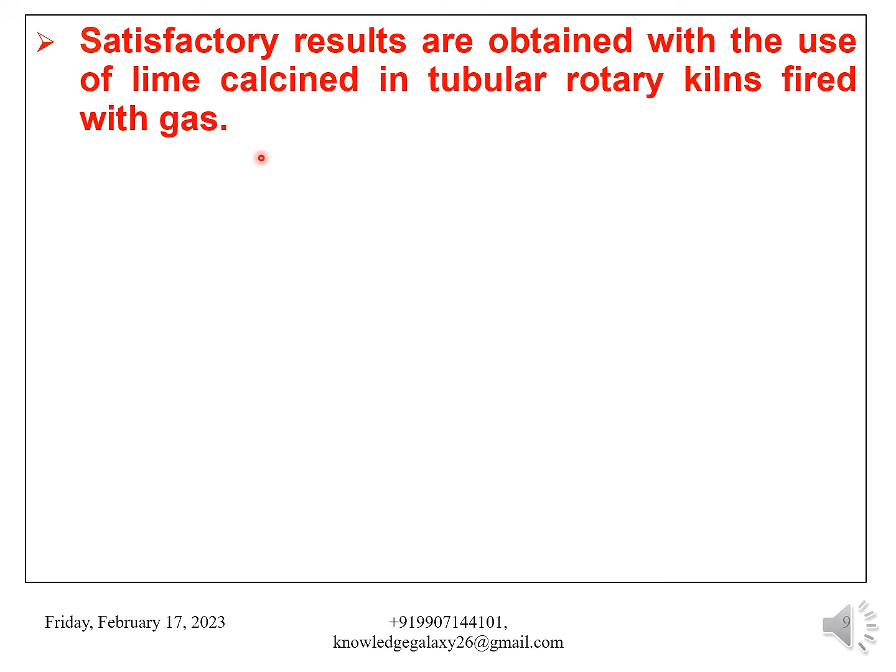The lime should be freshly burnt and contain at least 90% CaO and maximum 0.025% phosphorus, with a lump size of 80 mm maximum. Satisfactory results are obtained with the use of lime calcined in a tubular rotary kiln fired with gas. This lime is not contaminated by carbon bearing materials in the calcination process and is uniform in size. Its CaO content exceeds 93%.

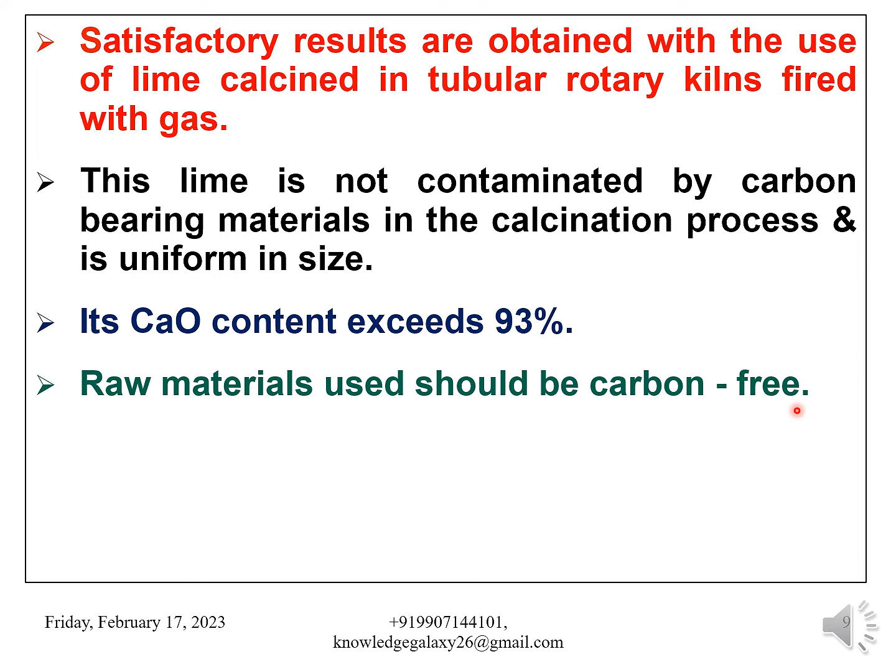Raw materials used should be carbon free. This special care must always be taken that the raw materials used should be carbon free. The composition of mixtures is set according to calculations and is checked during the smelting process.

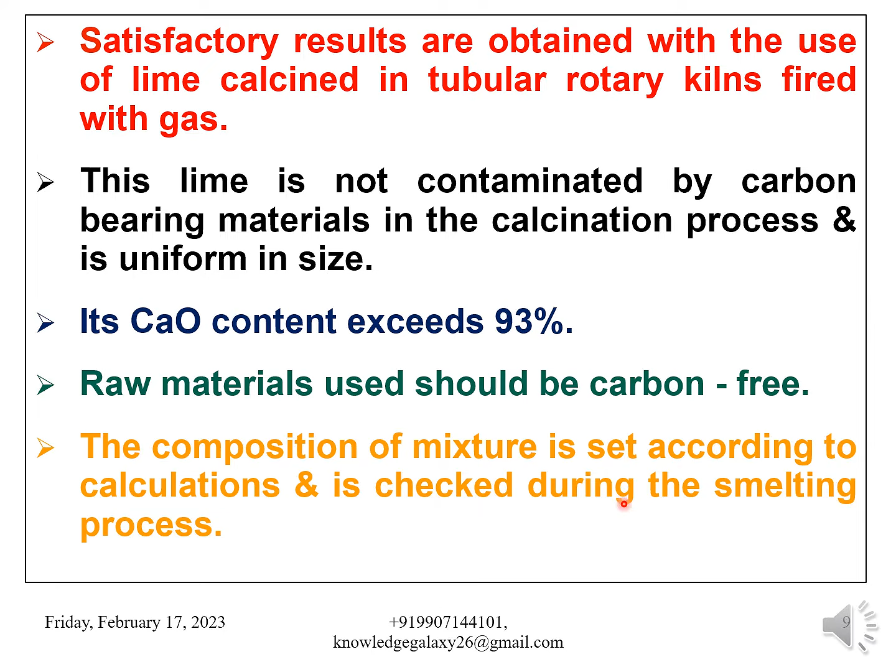The charge is calculated for 100 kg of chromium ore. The chromium ore assays 53% Cr2O3, 14% FeO, 7% SiO2, 12% MgO, 11% Al2O3, 2% calcination losses and 1% moisture. My dear friends, this is a typical example and analysis of the chromium ore. It may vary depending upon the availability of chromium ore and concentrates with you.

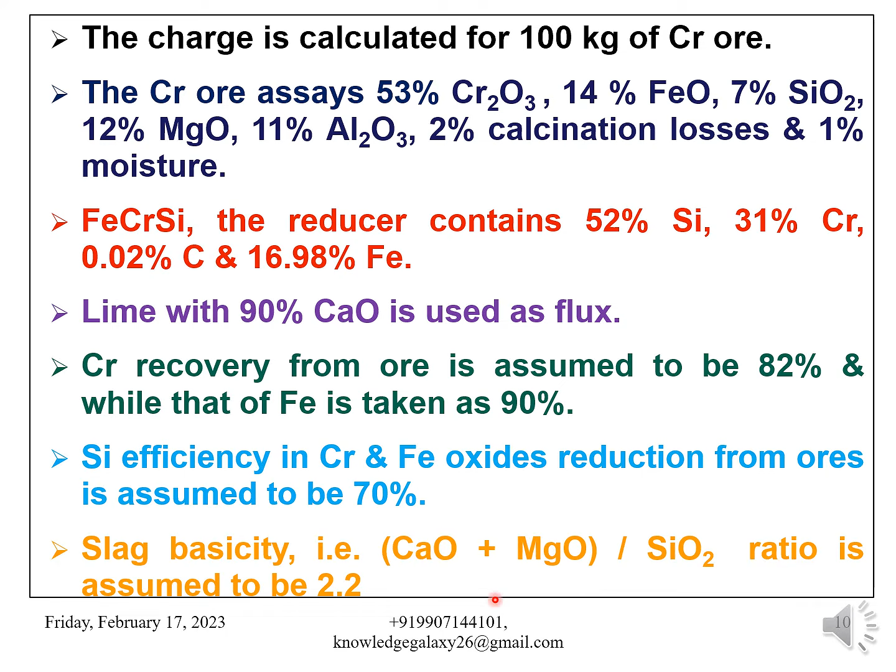Ferrochrome silicon, the reducer, contains 52% silicon, 31% chromium, 0.02% carbon and 16.98% iron. Lime with 90% CaO is used as flux. Chromium recovery from ore is assumed to be 82%, while that of iron is taken as 90%. Silicon efficiency in chromium and iron oxides reduction from ores is assumed to be 70%. Slag basicity, that is CaO plus MgO divided by SiO2 ratio, is assumed to be 2.2.

The charge is calculated so as to get an alloy containing 0.06% carbon and 0.70% silicon. The following amounts of components per 100 kg of chromium ore are reduced and reverted to the alloy.

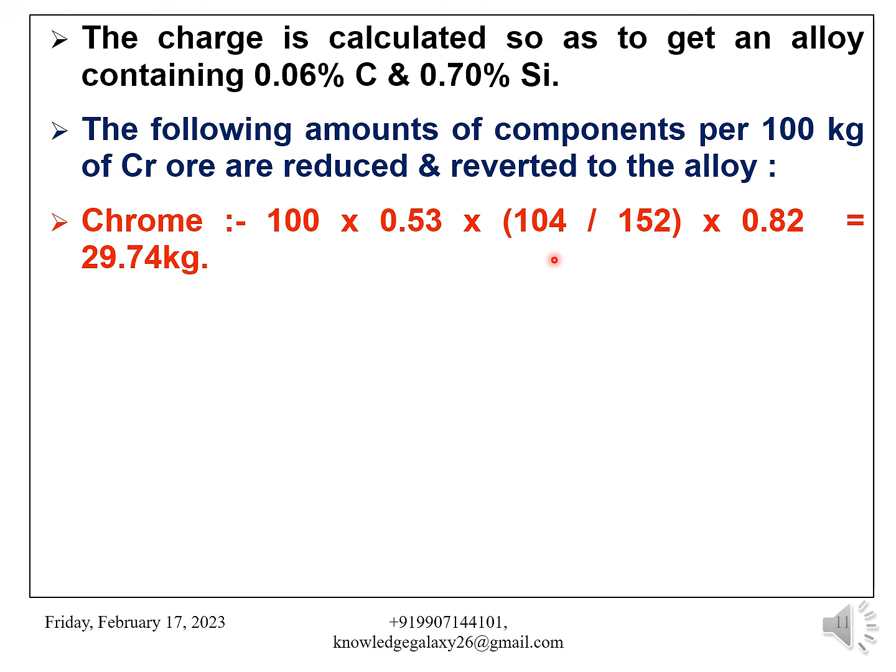Chrome: 100 into 0.53 into 104 divided by 152 into 0.82 is equal to 29.74 kg. My dear friends, here you have to always keep in mind the atomic weights of respective elements and compounds for calculating the quantities.

Next is iron: 100 into 0.14 into 56 divided by 72 into 0.9 is equal to 9.8. Here I would like to again bring to your notice that 0.82 and 0.9 are 82% and 90% recovery of chromium and iron respectively.

Amount of silicon required for the reduction of Cr2O3 by the reaction 2Cr2O3 plus 3Si is equal to 4Cr plus 3SiO2. It comes to 29.74 into 84 divided by 208 is equal to 12.01 kg.

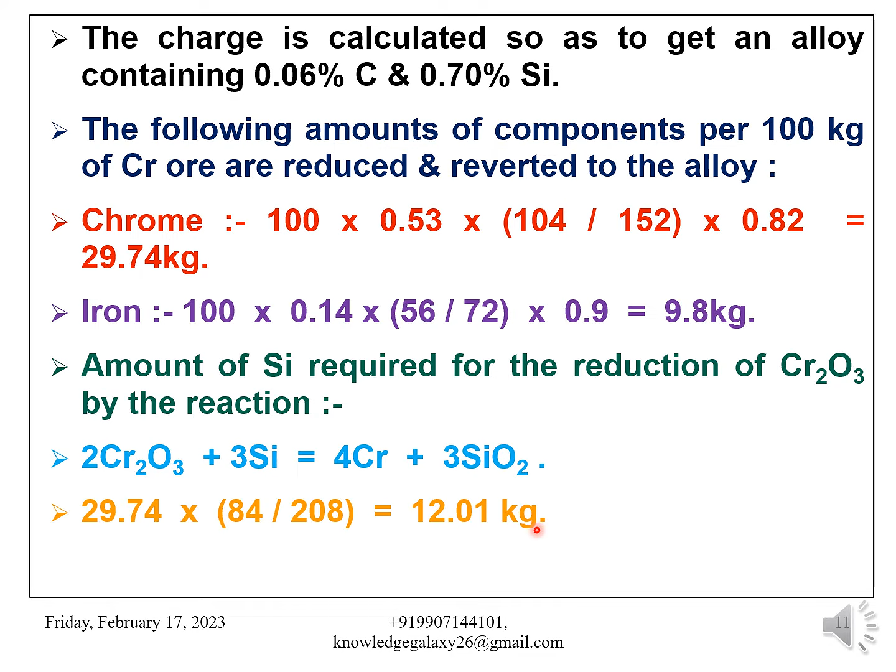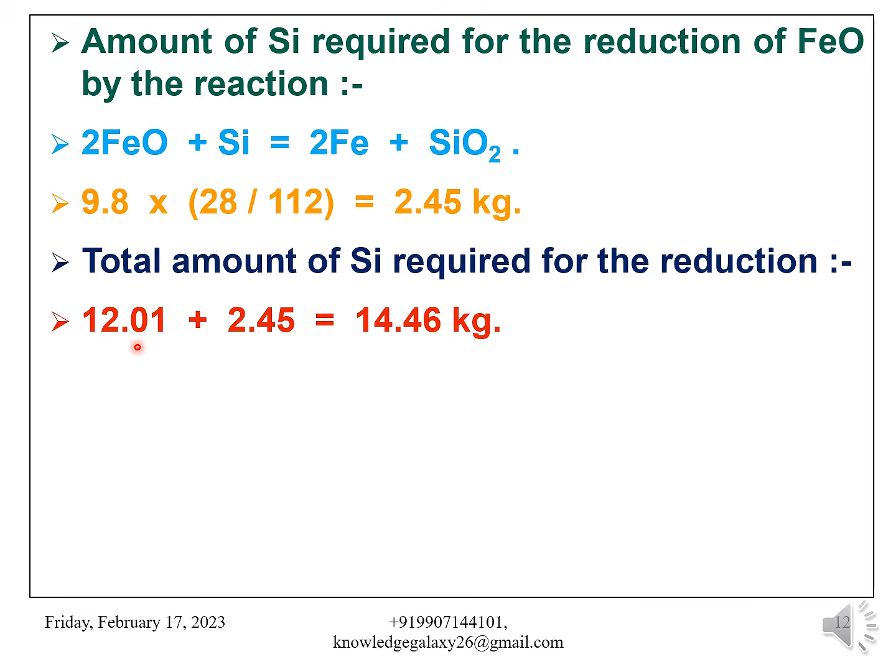Amount of silicon required for the reduction of FeO by the reaction 2FeO plus Si is equal to 2Fe plus SiO2, and it comes to 9.8 into 28 divided by 112 is equal to 2.45 kg. Total amount of silicon required for the reduction comes to 12.01 plus 2.45 is equal to 14.46 kg.

Amount of ferrochrome silicon required including volatilization losses is calculated as 14.46 divided by 0.52 into 0.7 is equal to 39.73 kg.

The following amounts of components are reverted to the alloy from ferrochrome silicon. Chromium: 39.73 into 0.31 is equal to 12.32 kg. Iron: 39.73 into 0.1698 is equal to 6.75 kg. Carbon: 39.73 into 0.0002 is equal to 0.008 kg.

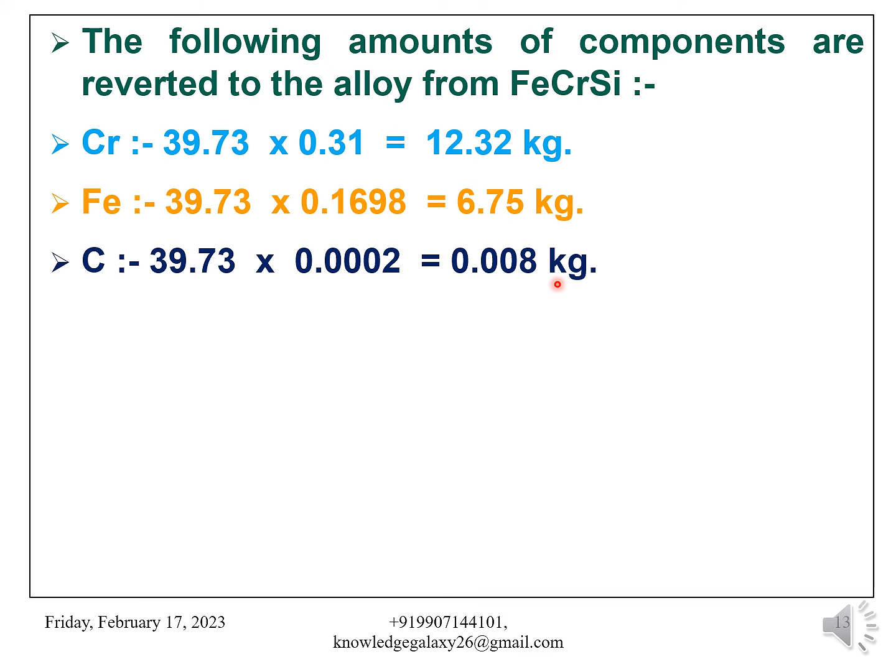The remaining amount of carbon up to the 0.06% carbon level is reverted to the alloy from the electrodes.

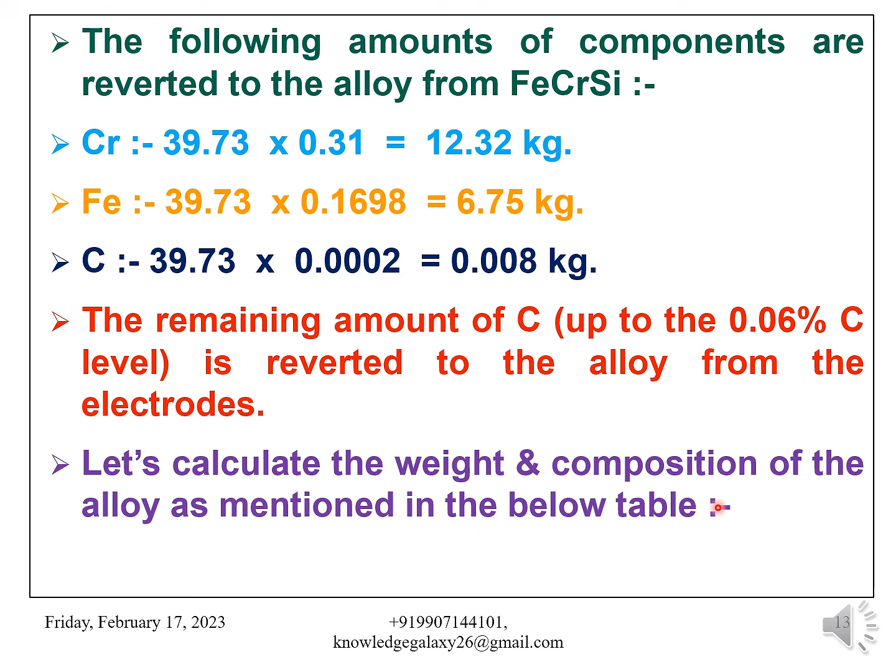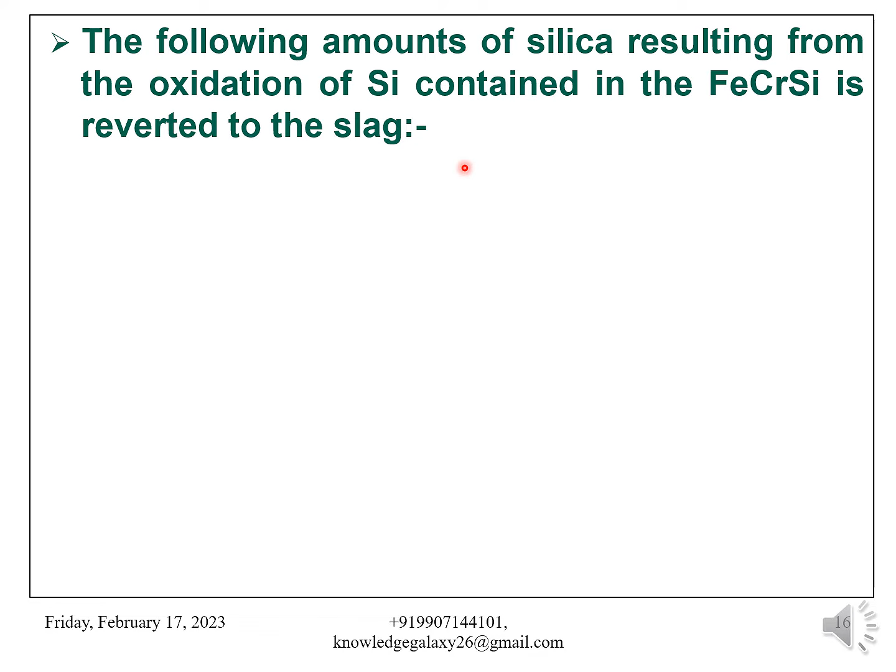Coming back, the following amounts of silica resulting from the oxidation of silicon contained in the ferrochrome silicon is reverted to the slag: 39.73 into 0.52 minus 0.42 into 60 divided by 28 is equal to 43.37 kg.

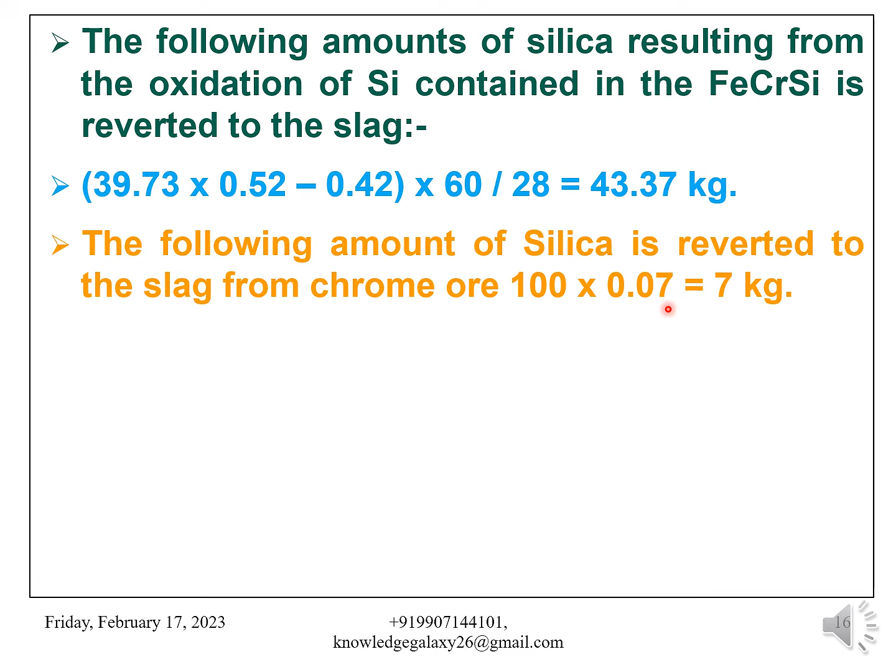The following amount of silica is reverted to the slag from chrome ore is equal to 100 into 0.07 is equal to 7 kg. Total silica contained in the slag is equal to 43.37 plus 7 is equal to 50.37 kg.

The amount of basic oxides CaO plus MgO required in the slag is calculated as 50.37 into 2.2 is equal to 110.81 kg.

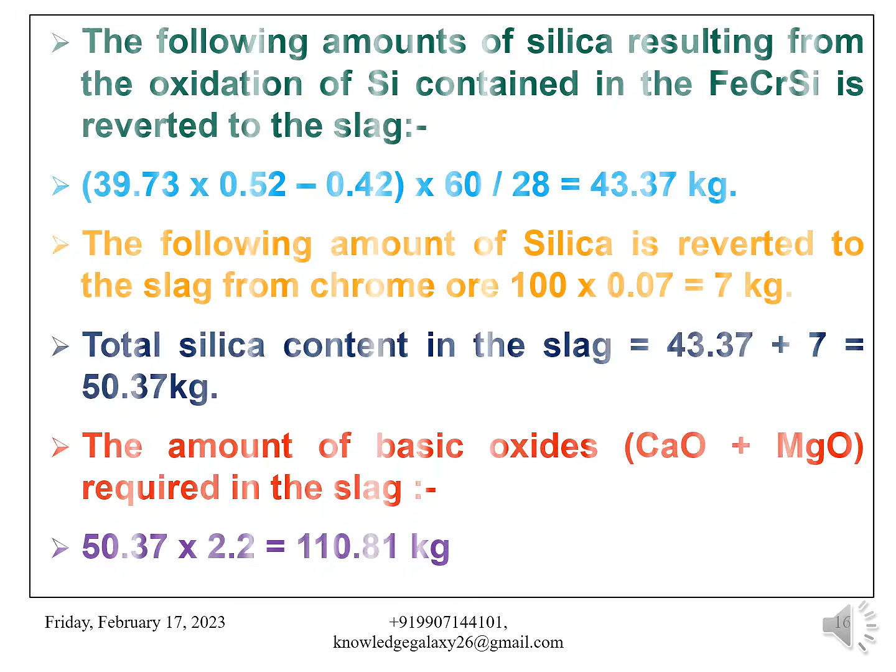The amount of MgO reverted to the slag from the chrome ore is calculated as 100 into 0.12 is equal to 12 kg. The amount of CaO to be introduced by lime is equal to 110.81 minus 12 is equal to 98.81 kg. This requires 98.81 divided by 0.9 is equal to 109.80 kg of lime.

The weight and composition of the slag are given in the table below. My dear friends, this table is also comprehensive, giving typical analysis of the various constituents, with their amounts in kg and percentage mentioned. You can pause the video and observe the table and its contents.

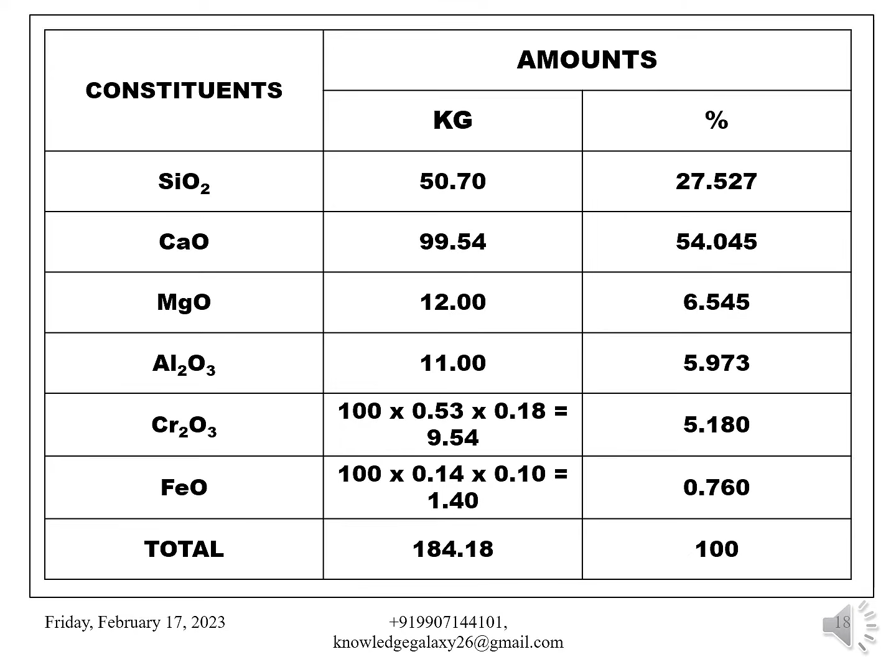Slag to alloy ratio is calculated as 184.18 divided by 59.06, which is equal to 3.12.

Composition of the mixture is summarized as chrome ore 100 kg, ferrochrome silicon 39.73 kg, lime 109.80 kg.

Chrome content in the mixture is calculated as 100 into 0.53 into 104 by 152, plus 12.32, which is equal to 36.26 plus 12.32, total comes to 48.58 kg.

Total chromium recovery to the alloy is calculated as 42.06 divided by 48.58 into 100, which is equal to 86.58%.

Dear friends, now I am going to discuss about the furnace, its lining, refractory linings, power ratings and other process parameters. So let us move on.

Furnaces smelting low carbon and extra low carbon ferrochrome are lined with magnesite firebricks. Furnace power rating is kept as 2500 to 3500 kVA.

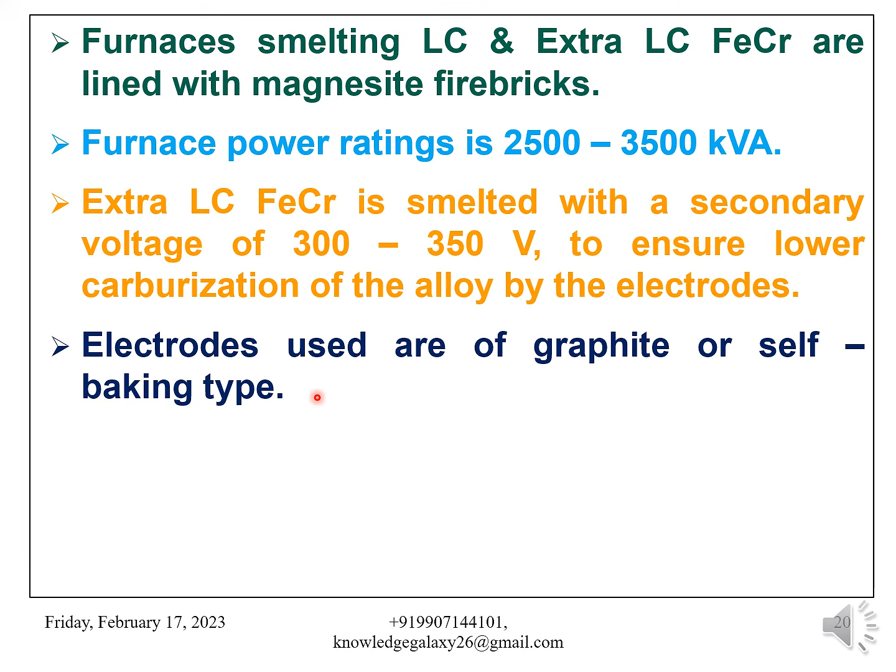Extra low carbon ferrochrome is smelted with a secondary voltage of 300 to 350 volts to ensure lower carburization of the alloy by the electrodes. Electrodes used are of graphite or self-baking type.

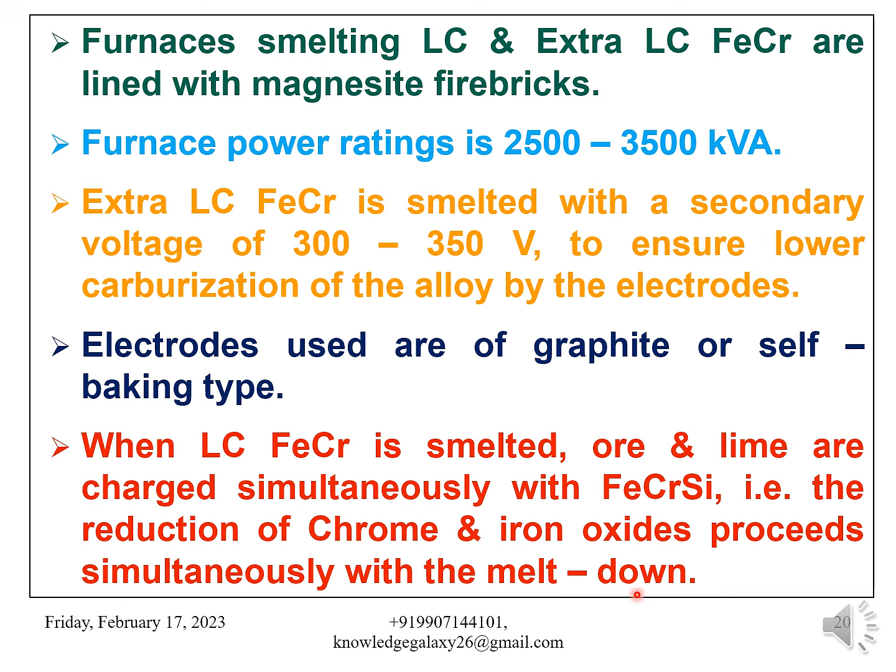When low carbon ferrochrome is smelted, ore and lime are charged simultaneously with ferrochrome silicon, that is, the reduction of chrome and iron oxides proceeds simultaneously with the meltdown. This shortens the duration of the heat through improved utilization of the heat generated by chrome and iron oxide reduction reactions.

In smelting extra low carbon ferrochrome, ferrochrome silicon is charged following the meltdown of the previously charged ore and lime. This ensures a decrease in the carbon content in the alloy because the furnace operates on highly conductive lime slags without silica additions.

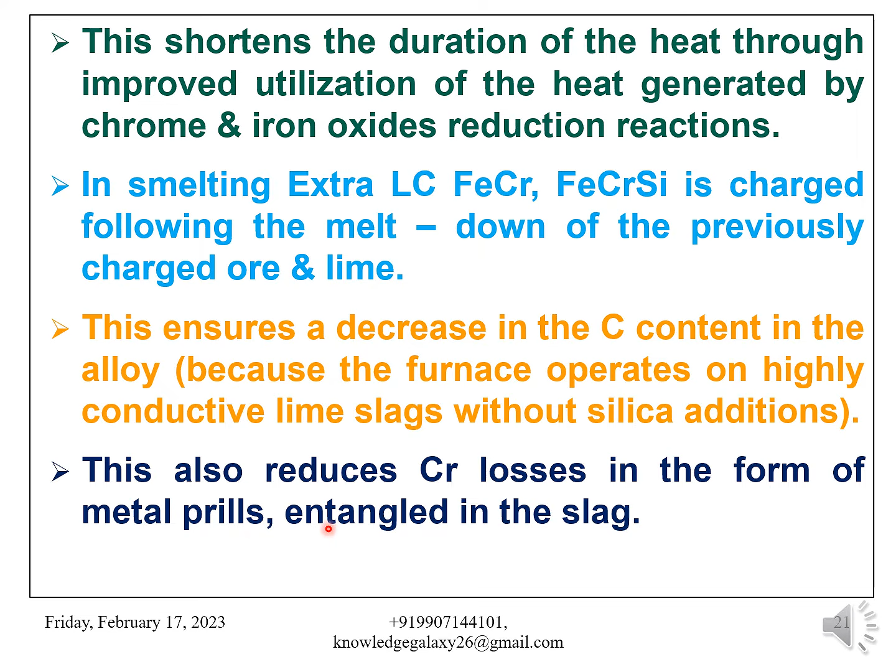This also reduces chromium losses in the form of metal prills entangled in the slag.

The smelting of extra low carbon ferrochrome is a periodic process and consists of the following stages. First, charging of the burden, that is ore and lime. Next is meltdown of the ore lime mixture.

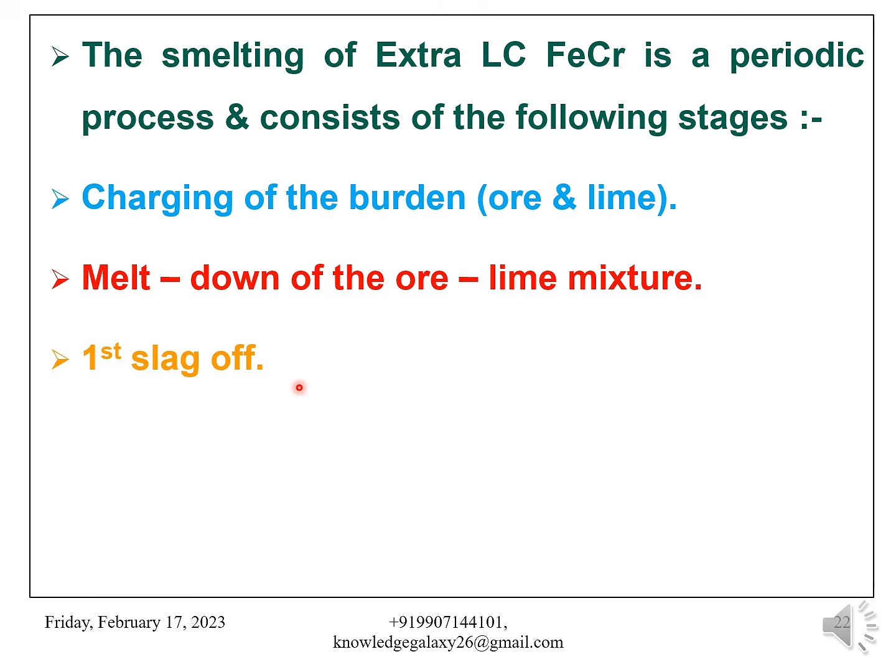Then first slag off. Next step is reduction of the ore lime melt by ferrochrome silicon. Tapping of the heat metal and remaining slag.

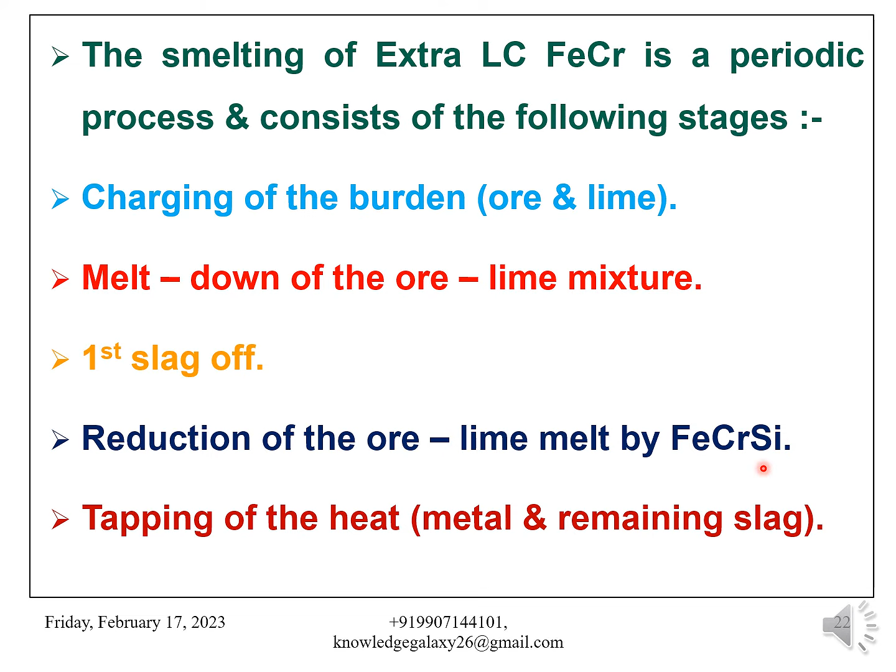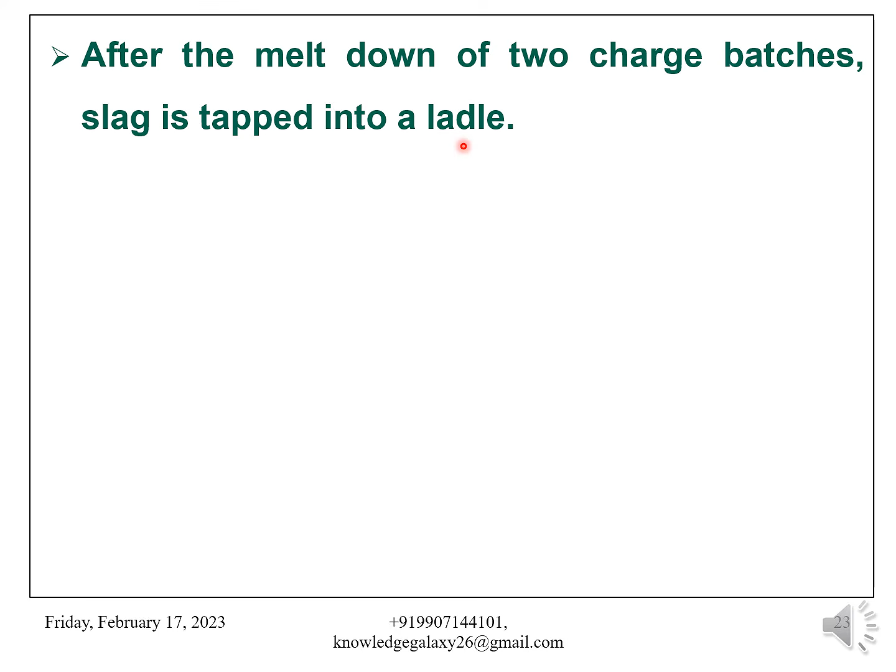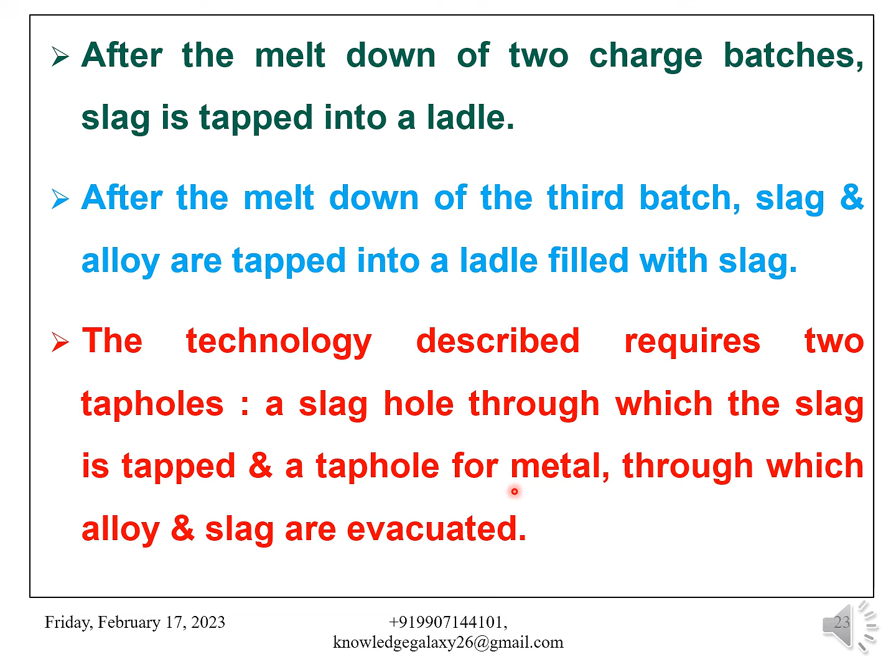After the meltdown of two charged batches, slag is tapped into a ladle. After the meltdown of the third batch, slag and alloy are tapped into a ladle filled with slag. The technology described requires two tap holes, a slag hole through which the slag is tapped and a tap hole for metal through which alloy and slag are evacuated.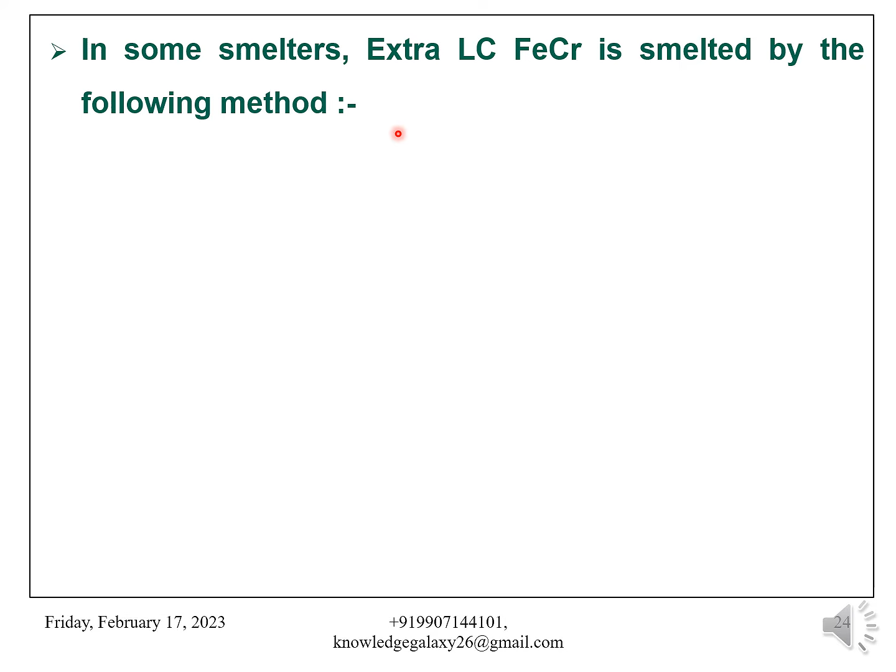In some smelters, extra low carbon ferrochrome is smelted by the following method. There is yet another method of production of extra low carbon ferrochrome which I am going to describe now. The furnace is charged with 1800 kg of ore and the estimated amount of lime.

At the beginning of the meltdown, that is 8 to 10 minutes, the electrodes are adjusted manually. After the formation of the fused holes round the electrodes, the furnace is switched to automatic control.

The meltdown of the first charge ends with the consumption of approximately 1600 kWh of power. Following this, the remaining unsmelted mixture is pushed away from the walls.

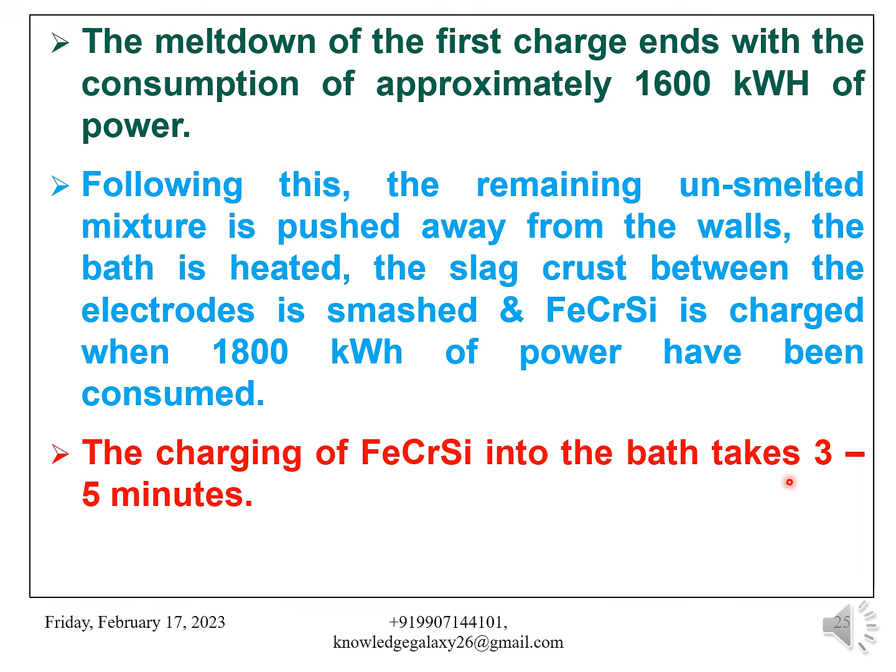The bath is heated, the slag crust between the electrodes is smashed and ferrochrome silicon is charged when 1800 kWh of power have been consumed. The charging of ferrochrome silicon into the bath takes 3 to 5 minutes.

When 2000 to 2200 kWh have been consumed, the melting of the first charge is completed and the electrodes are then lifted for 2 or 3 minutes to permit the formation of the slag crust. If this is not done, the slag starts boiling violently when the second batch of the mixture is dumped.

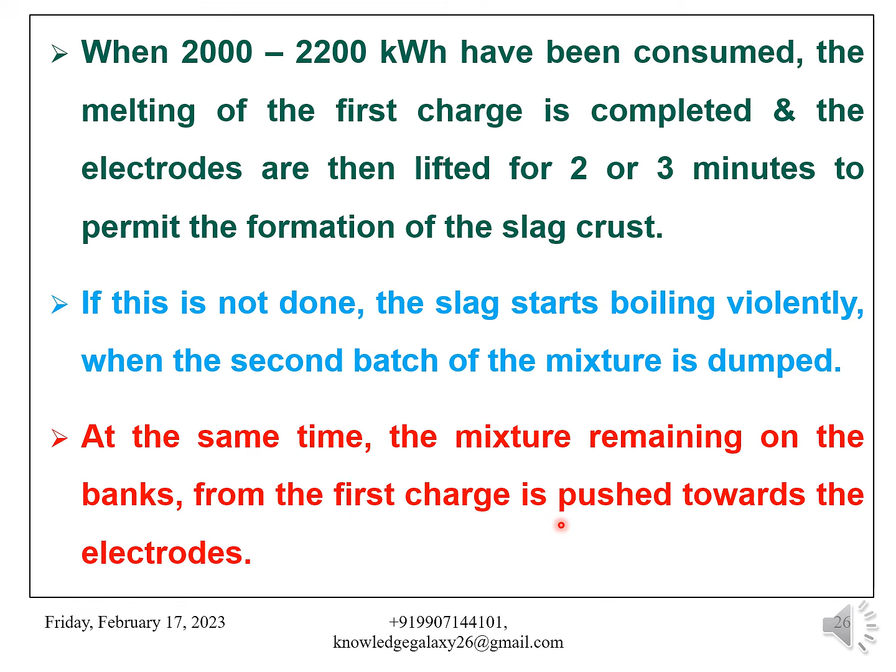At the same time, the mixture remaining on the banks from the first charge is pushed towards the electrodes.

The second batch of ferrochrome silicon is charged into the furnace when power consumption from the beginning of the heat reaches approximately 4800 kWh.

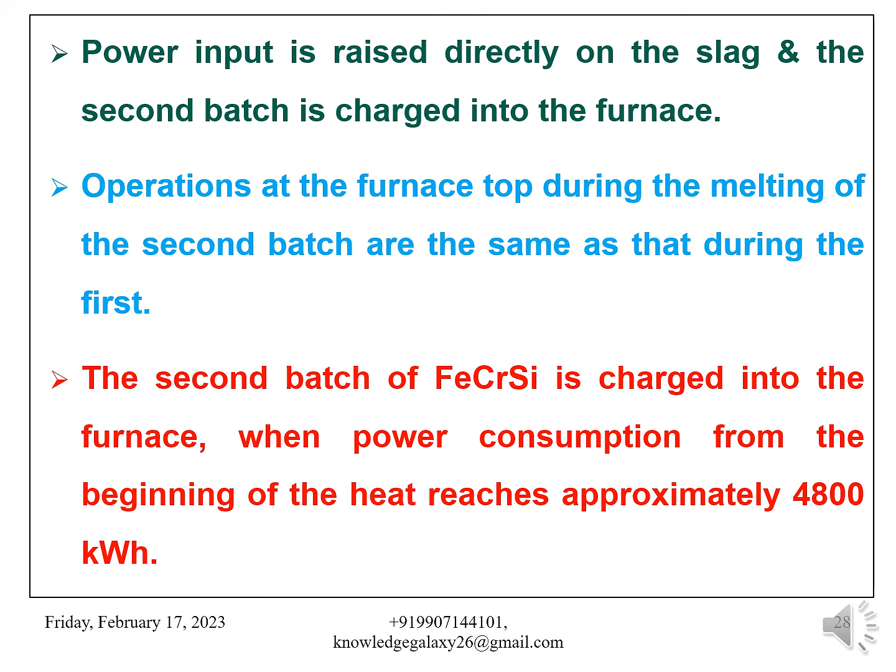The heat is considered completed when 6400 to 6600 kWh of power have been consumed.

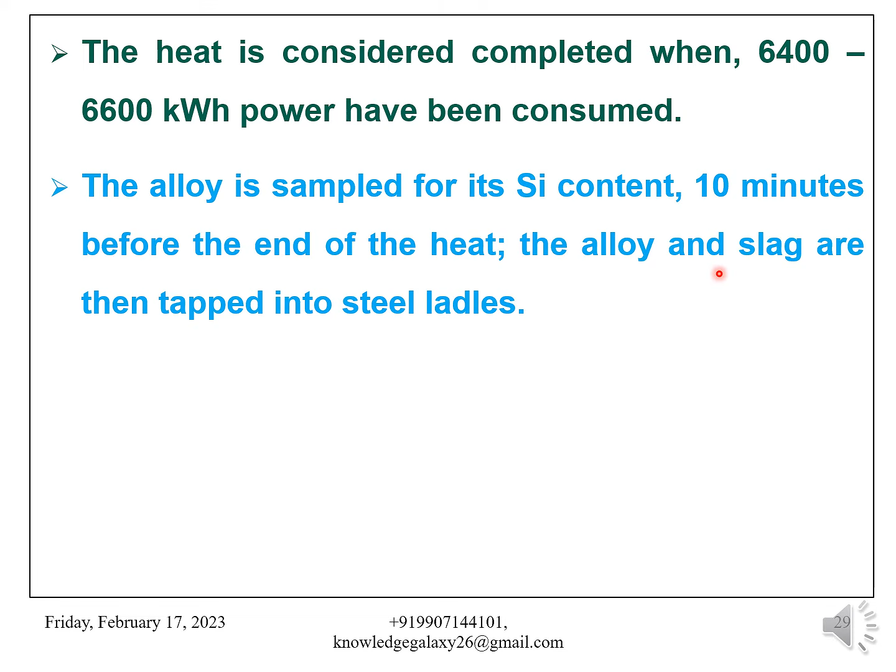The alloy is sampled for its silicon content 10 minutes before the end of the heat. The alloy and slag are then tapped into steel ladles.

After the tapping of the alloy, the hearth is inspected, the crust is knocked down from the furnace rims, and the walls are fettled with the mixture left over from the preceding heat.

Prior to applying power, it is necessary to charge 150 to 200 kg of lime and 100 to 150 kg of ferrochrome silicon in successive layers beneath the electrodes on the skin of the slag remaining from the heat.

All this is done to prevent carburization of the alloy when furnace power is reapplied.

Power input to the electrodes should be raised very carefully. Electrode penetration into the slag and its contact with alloy remaining in the furnace should be avoided.

The mixture is to be charged when power input reaches 25% of the nominal ratings. The mixture is charged into the furnace from the furnace bins, mainly near the walls.

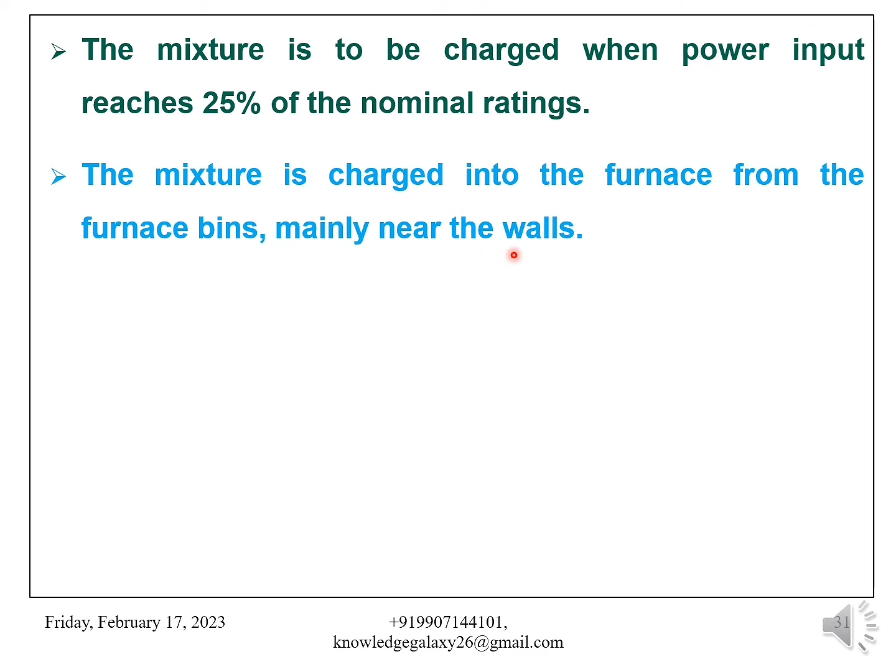The process is conducted with short electric arcs whose length is adjusted by pushing the unsmelted mixture into the holes around the electrodes. The mixture is fed by small portions as the holes appear at the electrodes.

The rate at which the mixture is fed should ensure stable and nominal power input and prevent electrode penetration into the slag.

When the charge collapses and slag agitation sets in, the electrodes should be lifted temporarily to decrease power input.

The initial charge following the tapping is melted incompletely.

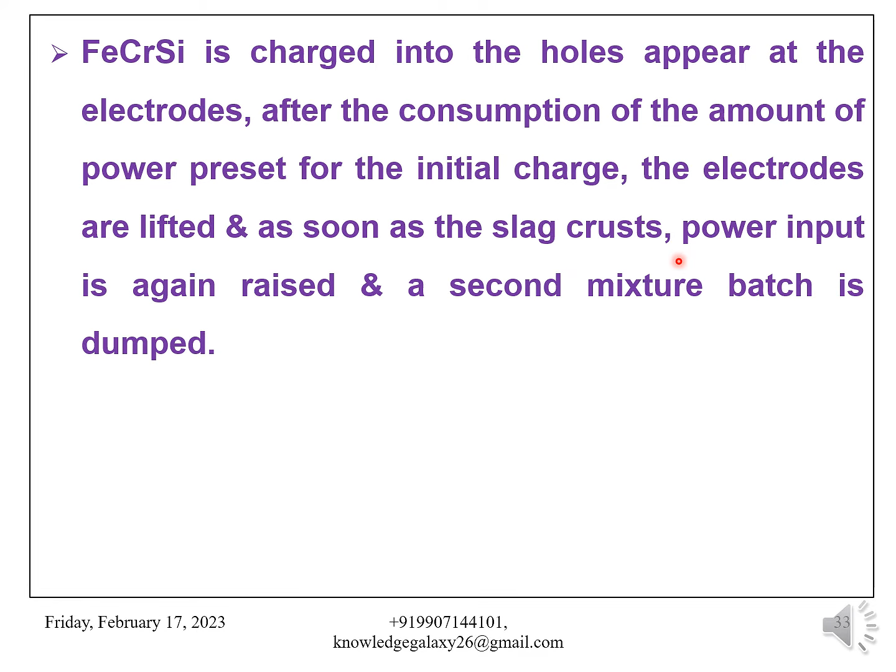Ferrochrome silicon is charged into the holes that appear at the electrodes after the consumption of the amount of power preset for the initial charge. The electrodes are lifted, and as soon as the slag crusts, power input is again raised and a second mixture batch is dumped.

In the case of 1800 kg of ore and the estimated amount of lime, power consumption for the first charge batch usually comes to 2100 to 2400 kWh.

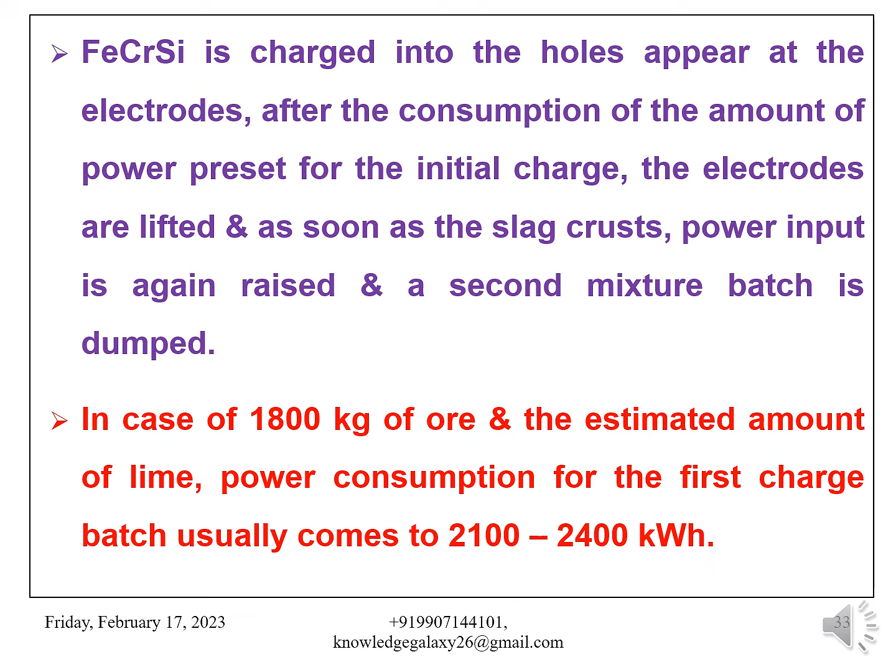The second and third batches are melted down completely. If the furnace operates normally, the power consumption amounts to 160 kWh per 100 kg of ore.

The mixture should be melted down entirely, with no unsmelted materials remaining between the electrodes and the furnace sides.

The slag crust between the electrodes is broken up before the ferrochrome silicon is fed into the bath, after the meltdown of the ore-lime portion of the mixture. The charging of ferrochrome silicon takes approximately 10 minutes.

If the slag doesn't boil when the ferrochrome silicon is being charged and the reducer remains at the surface of the slag, the bath is mixed artificially with an addition of 2 or 3 shovelfuls of chromium ore to provoke bath agitation.

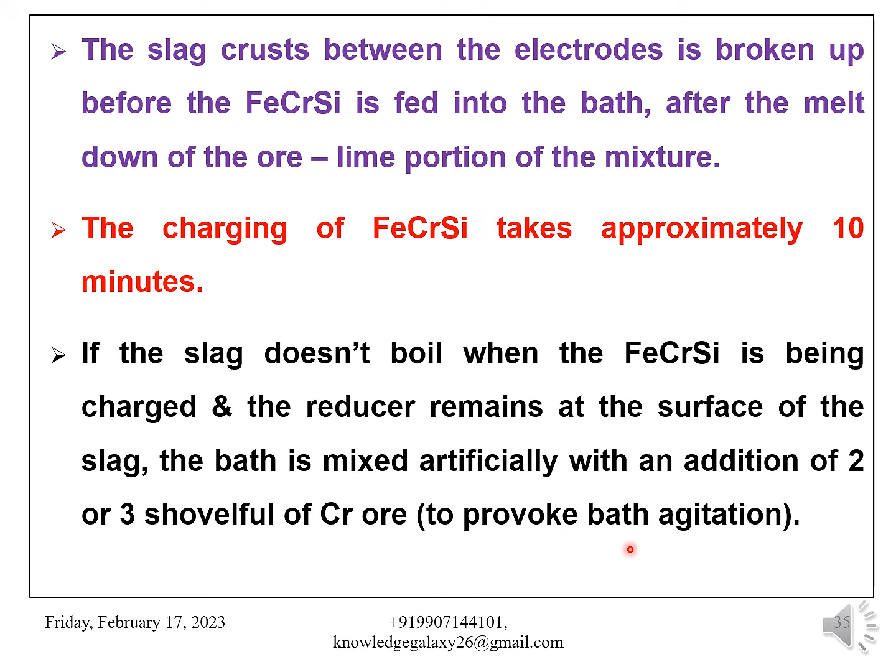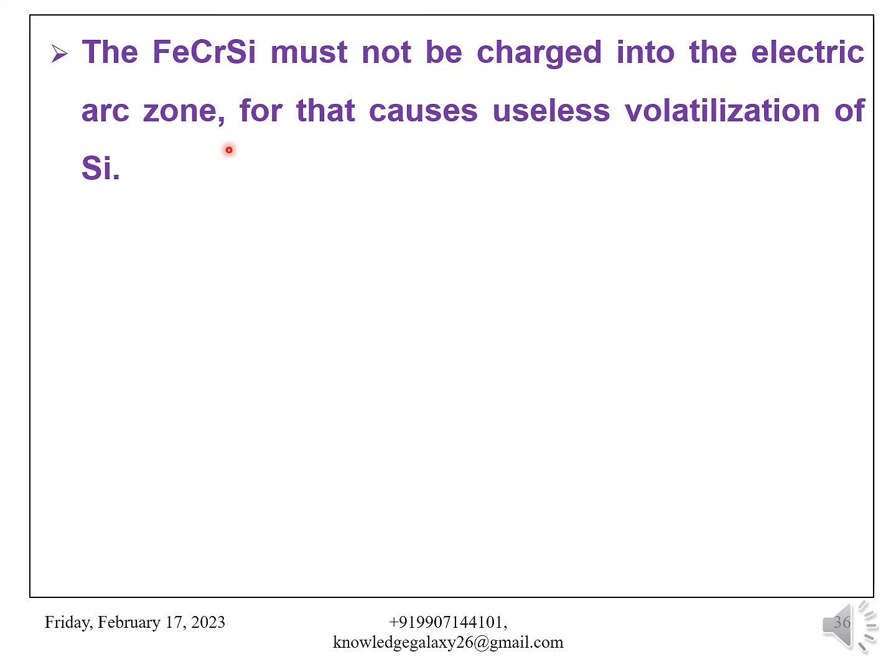The ferrochrome silicon must not be charged into the electric arc zone, as that causes a useless volatilization of silicon.

After the entire portion of the reducer has been charged, the bath is mixed once more. The furnace is operated for 10 minutes and the slag and alloy are then tapped.

Prior to tapping of the alloy, 3 samples are taken by the spoon and the silicon content is assayed visually.

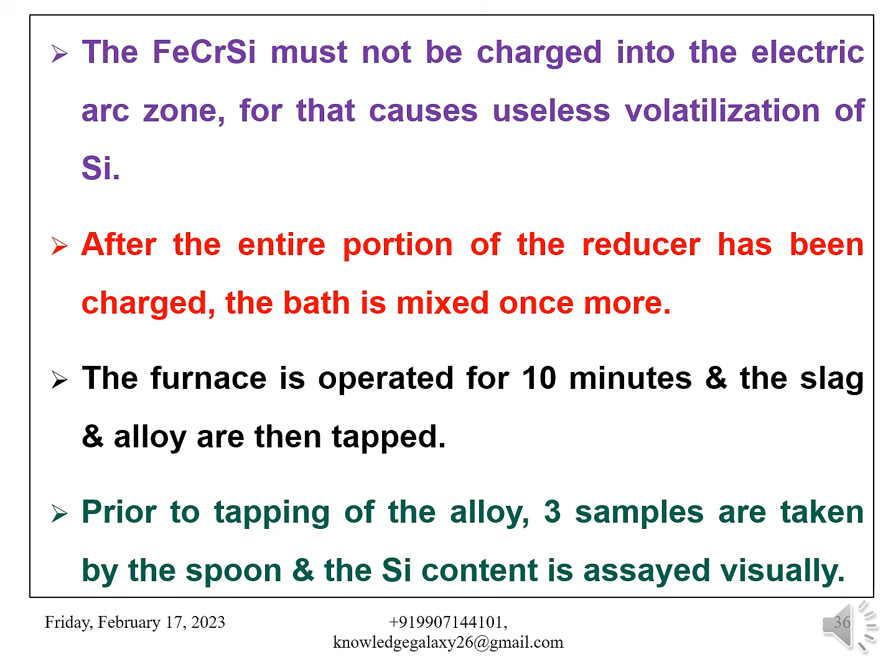The electric power energy consumption for the smelting of second and third batches, with the ore weighing 1800 kg per charge, averages 3000 and 3000 to 3300 kWh respectively.

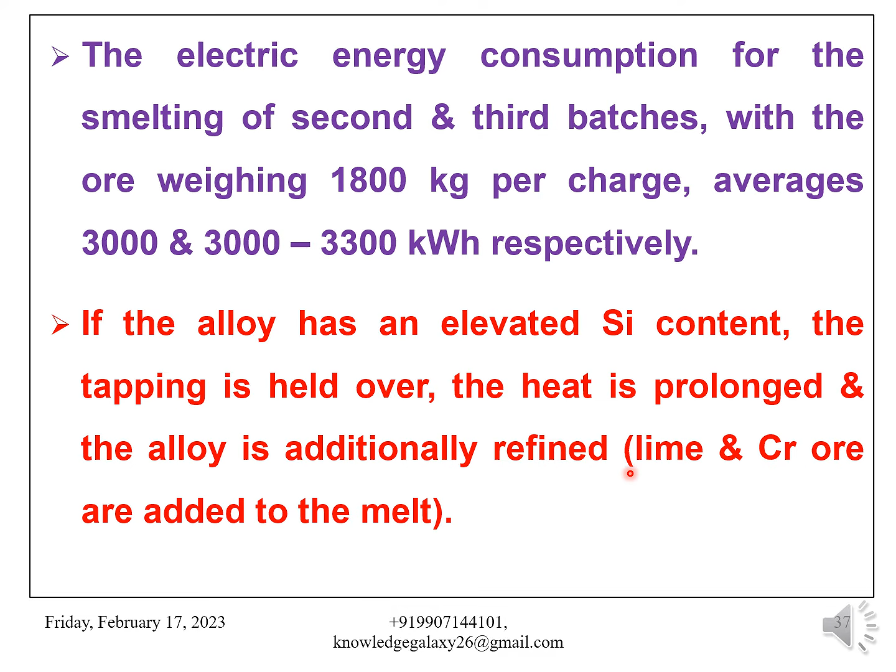If the alloy has an elevated silicon content, the tapping is held over, the heat is prolonged, and the alloy is additionally refined. Lime and chromium ore are added to the melt.

If this doesn't suffice, the slag hole is opened and the slag is tapped, and a fourth batch with the amount of lime increased by 200 to 300 kg against the normal quota is charged.

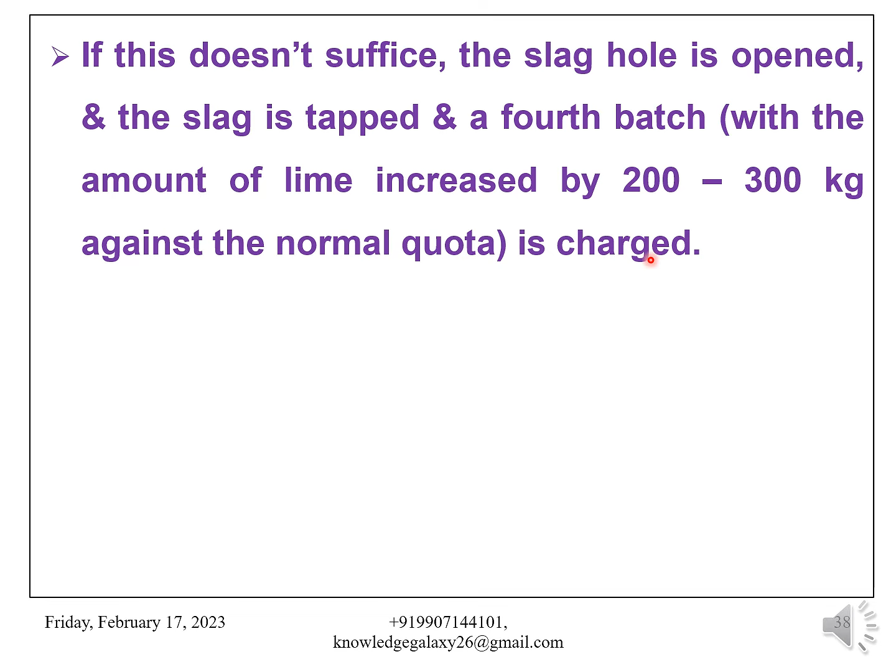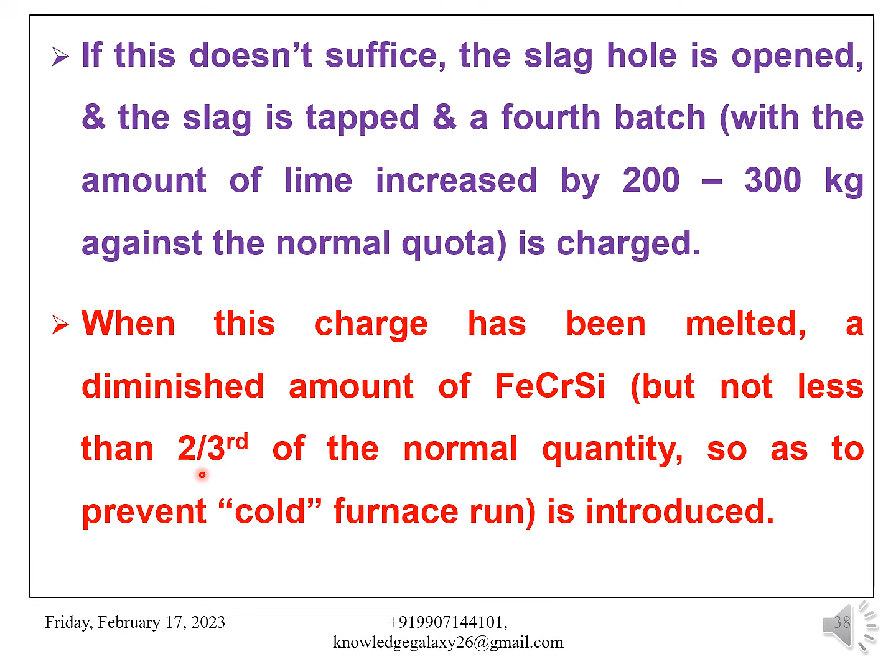When this charge has been melted, a diminished amount of ferrochrome silicon, but not less than two-thirds of the normal quantity, is introduced so as to prevent a cold furnace run.

The alloy bath is then sampled, and if the alloy is up to the standard specifications, the heat is tapped out.

A so-called cold furnace run may come about in the manufacturing of low carbon and extra low carbon ferrochrome. This occurrence is characterized by elevated power consumption and a high silicon content in the alloy.

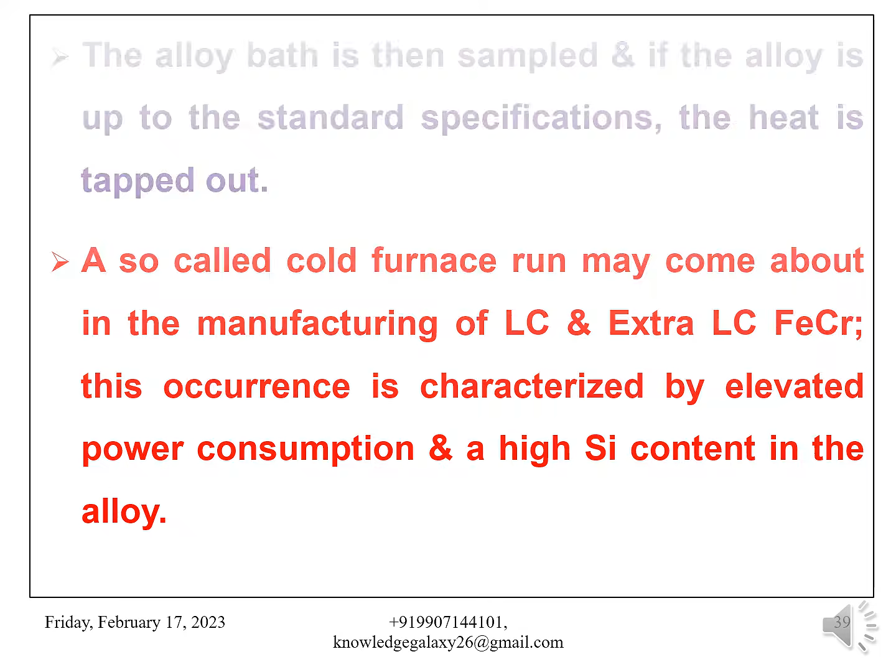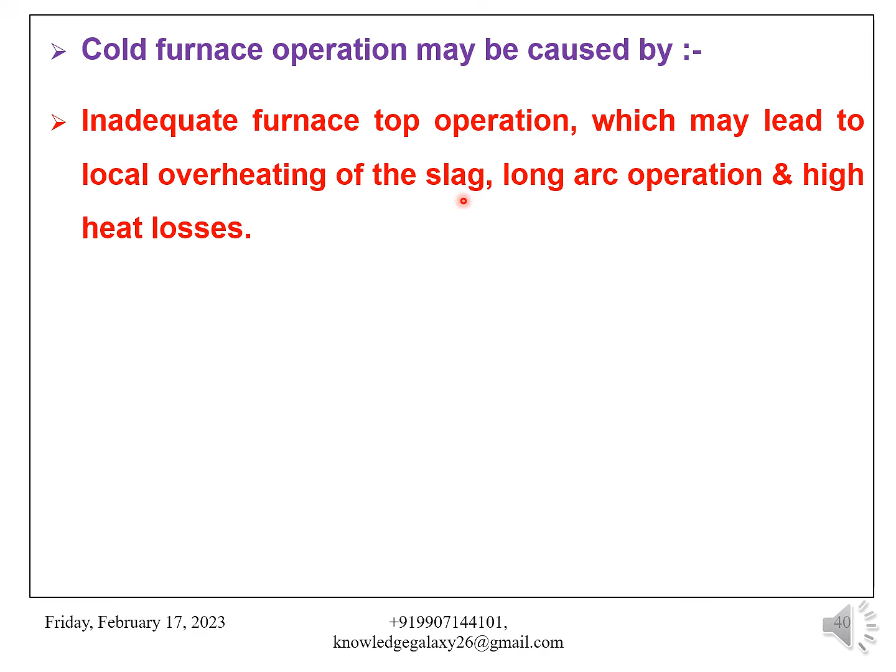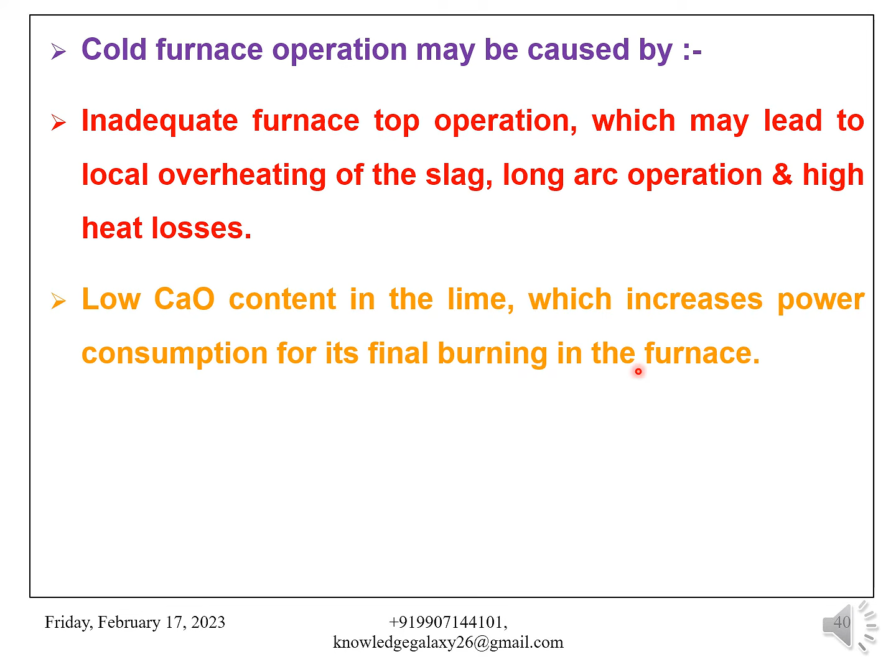Cold furnace operation may be caused by inadequate furnace top operation, which may lead to local overheating of the slag, long arc operation, and high heat losses. Also low CaO content in the lime, which increases power consumption for its final burning in the furnace, prolonged furnace downtime, and excessive amounts of ferrochrome scrap being remelted.

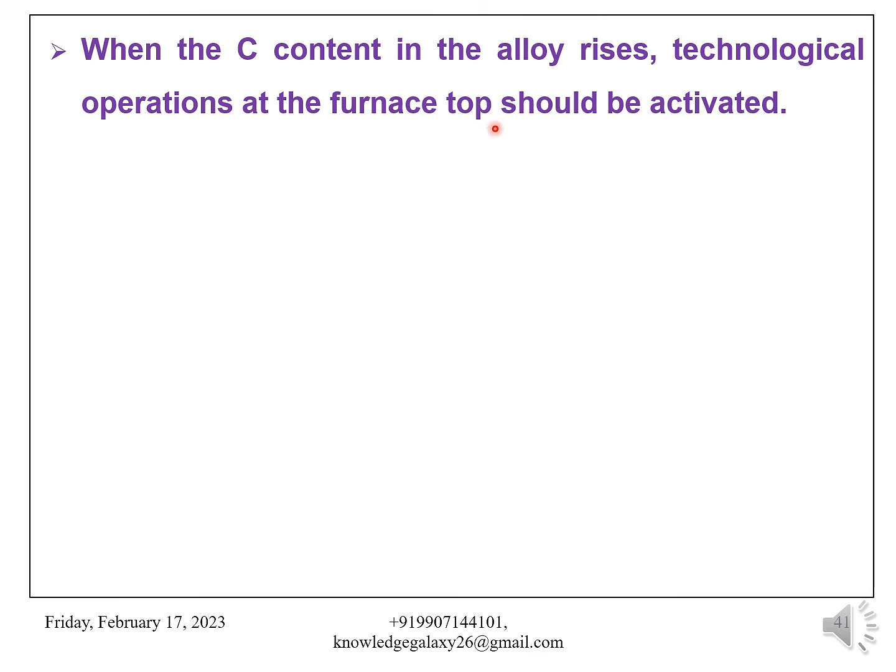When the carbon content in the alloy rises, technological operations at the furnace top should be activated. Raw materials should be carefully checked for carbon contaminations and electrode tips inspected for crumbling.

If the slag analysis reveals a low CaO content, that is below 48%, or an increased Cr2O3 content, that is above 5%, one should check on the correctness of the proportions, taking into account actual raw materials analysis.

If necessary, the proportion of lime and ferrochrome silicon should be modified.

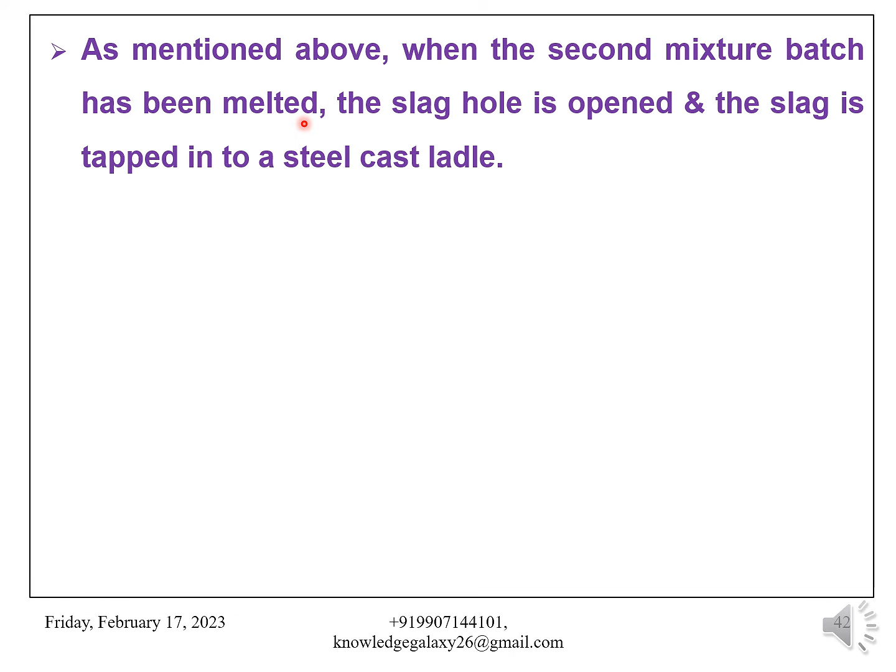As mentioned above, when the second mixture batch has been melted, the slag hole is opened and the slag is tapped into a steel cast ladle. The latter should be filled with slag to the lip.

Following the tapping of the slag, its surface in the ladle is covered with slag dust 50 to 60 mm thick, so as to prevent the formation of a thick slag crust.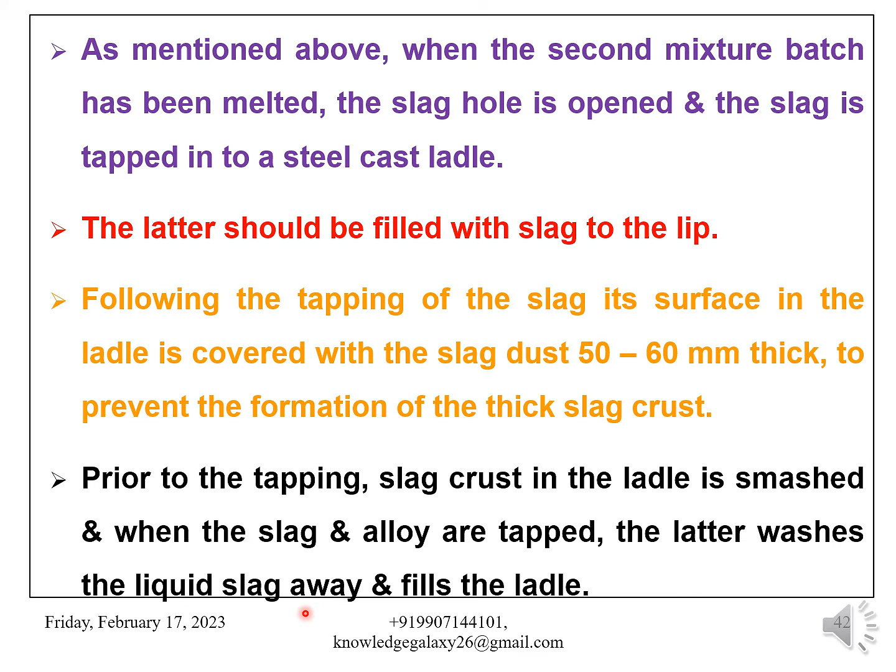Prior to the tapping, slag crust in the ladle is smashed, and when the slag and alloy are tapped, the latter washes the liquid slag away and fills the ladle.

The tap hole is opened either with a bar or with an electric arc aided by an iron rod, or with oxygen lancing.

To tap the slag and the alloy, the tap hole is opened wide to permit their simultaneous outflow, thus reducing the tapping time to 10 minutes or less.

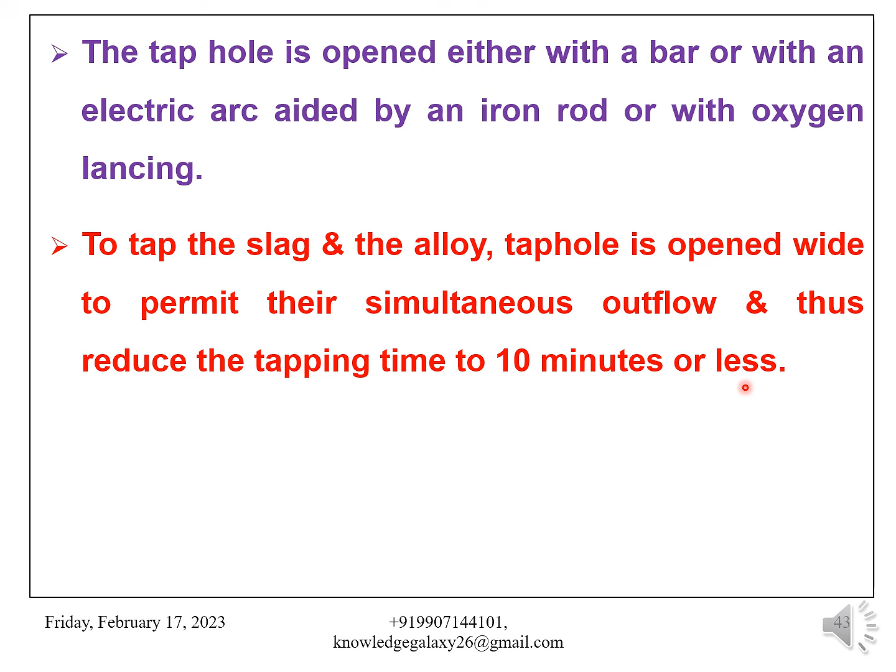Excessive slag flows over from the first ladle into the second, then into the third, or into cast iron slag pots.

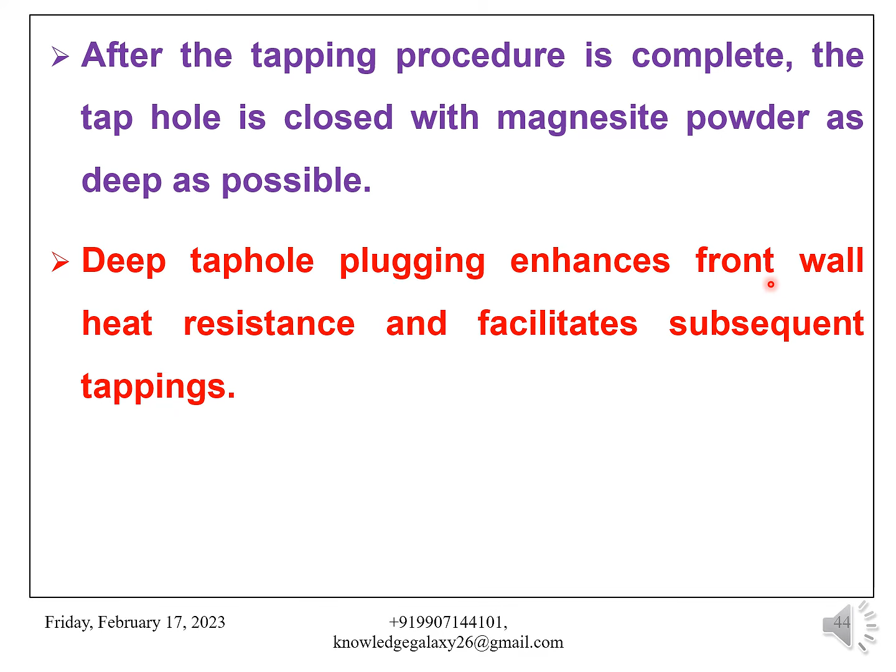After the tapping procedure is complete, the tap hole is closed with magnesite powder as deep as possible. Deep tap hole plugging enhances front wall heat resistance and facilitates subsequent tappings.

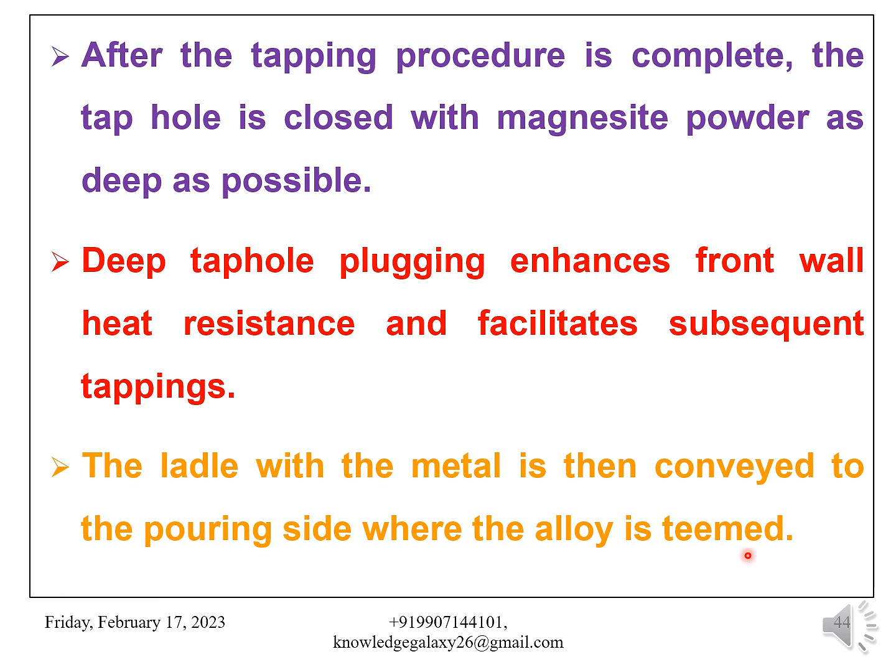The ladle with the metal is then conveyed to the pouring site where the alloy is teemed. When the ladle is not filled with the alloy completely, the slag is poured out into slag pots.

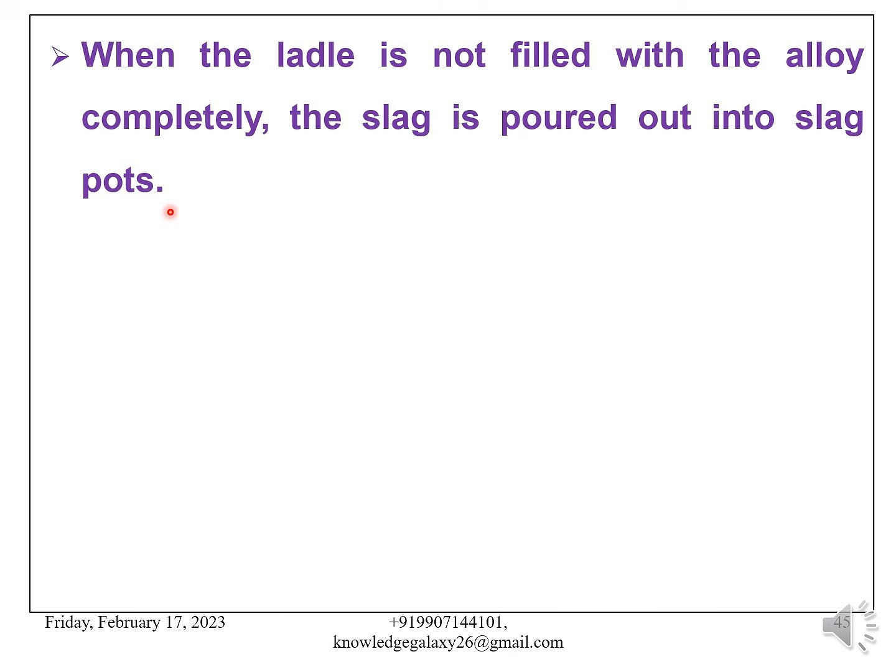The small amount of slag remaining in the ladle is thickened by an addition of crushed lime to prevent slag from infiltrating into the teemed alloy.

Ferrochrome is teemed into whitened steel or cast iron molds into ingots of 50 to 100 mm thick.

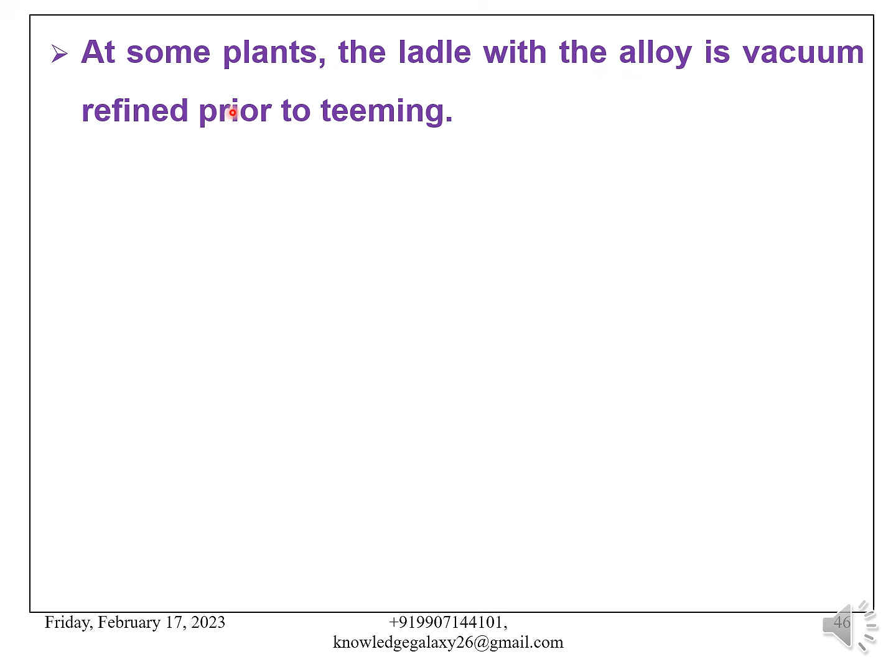At some plants, the ladle with the alloy is vacuum refined prior to teeming. This permits obtaining a dense ferrochrome ingot.

Ferrochrome is teemed into whitened steel or cast iron molds into ingots of 50 to 100 mm thick.

After solidification, ferrochrome ingots are stripped and sent to the finished products area, where they are crushed into lumps weighing not more than 15 kg and cleared of slag.

Then they are packed into cases on the batch principle and shipped to the consumers. In some instances, the alloy is shipped to the consumers in bulk, that is, without packing.

Every heat is analyzed for chromium, silicon, carbon and phosphorus contents.

The approximate chemical composition of extra low carbon ferrochrome is as follows: 70 to 71% chromium, 0.06 to 0.08% carbon, 0.60 to 0.80% silicon, and 0.042 to 0.051% phosphorus. This is a typical example of analysis of extra low carbon ferrochrome.

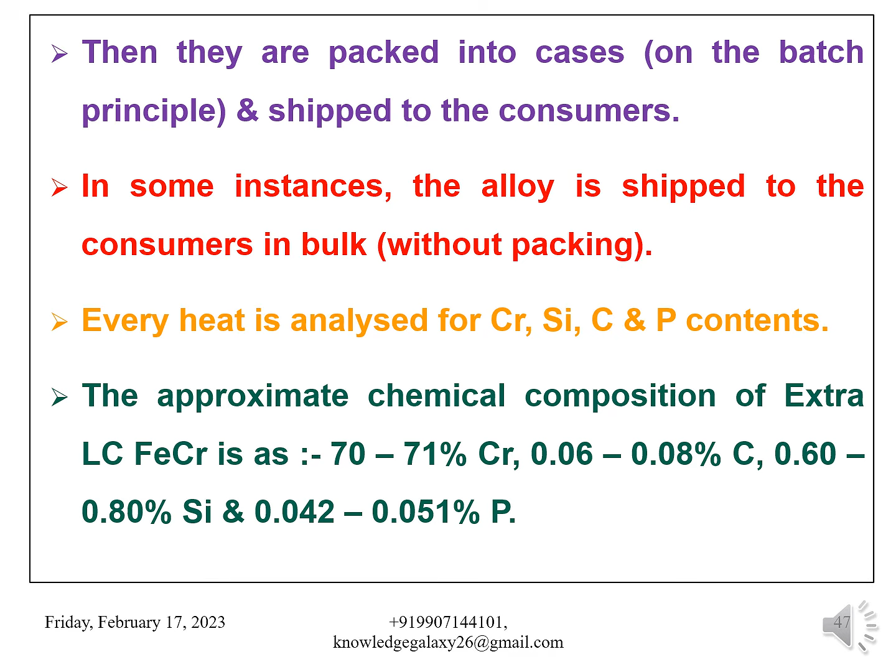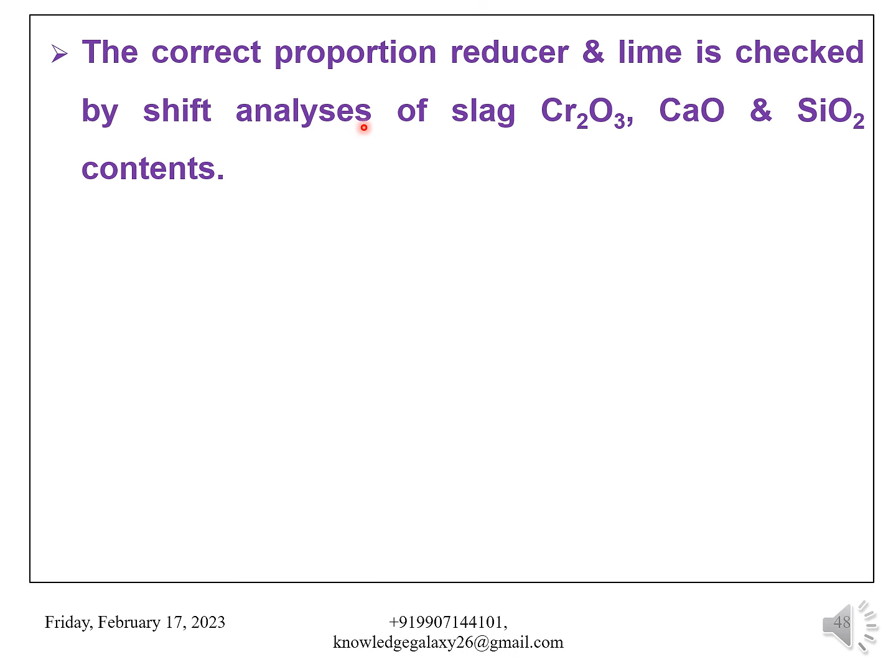The correct proportion of reducer and lime is checked by shift analysis of slag, Cr2O3, CaO and SiO2 contents.

Approximate slag composition shall be as follows: 51 to 52% CaO, 3.8 to 5.4% Cr2O3, 5.3 to 6.5% Al2O3, 0.6 to 0.8% FeO, 8.5 to 10% MgO, and 26 to 29% SiO2.

Consumptions of raw materials, electrodes and power, as well as chromium recovery in extra low carbon ferrochrome smelting, are given in the next slide.

Chrome ore at 50% Cr2O3, its consumption is 1600 kg per ton. Next is ferrochrome silicon, that is the reducer, 50% silicon, its consumption is 600 kg per ton. Lime is 1350 kg per ton.

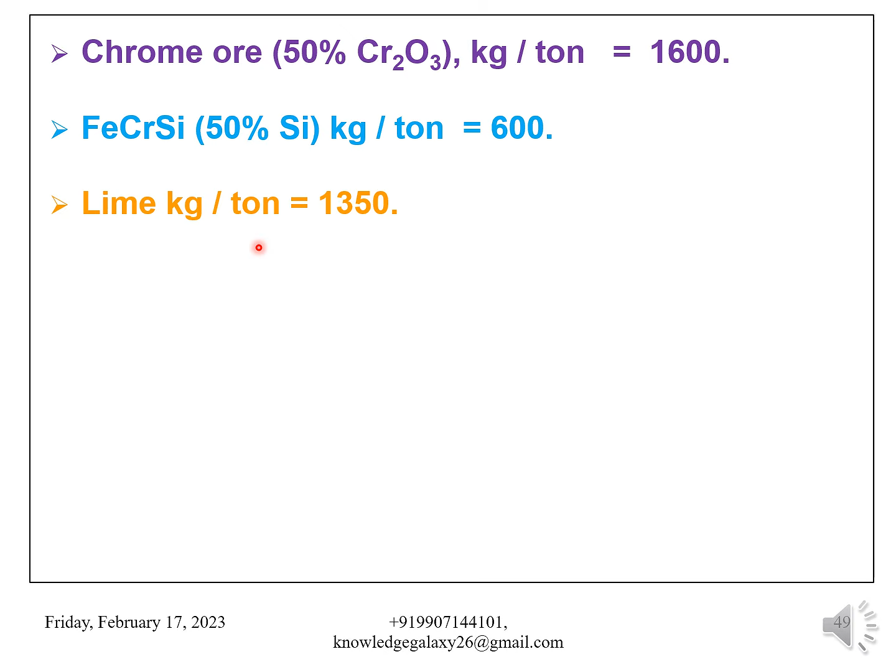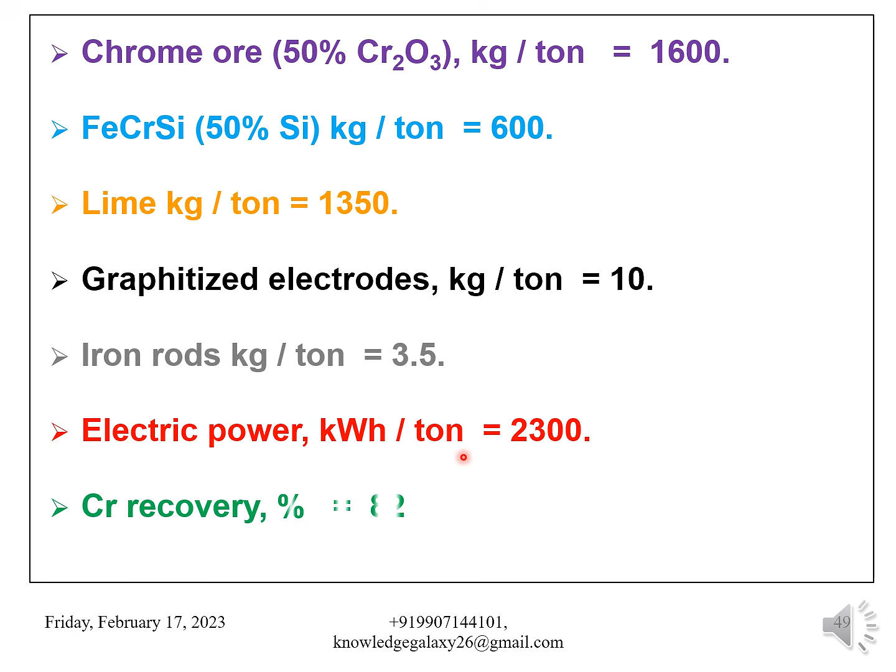Graphitized electrodes: 10 kg per ton. Iron rods: 3.5 kg per ton. Electric power: 2300 kWh per ton. And chromium recovery comes to 82%.